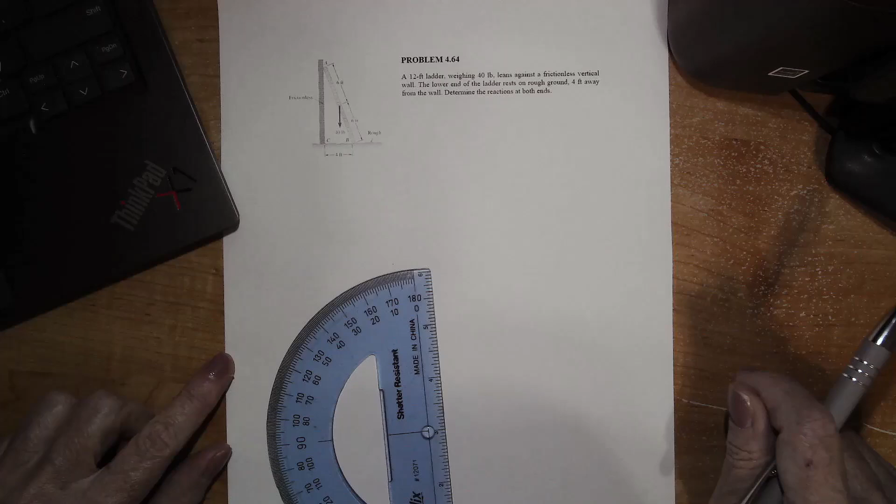For this problem, we're given a ladder 12 feet tall. It weighs 40 pounds, and it's leaning against a frictionless vertical wall. The lower end of our ladder rests on a rough ground, 4 feet away from the wall.

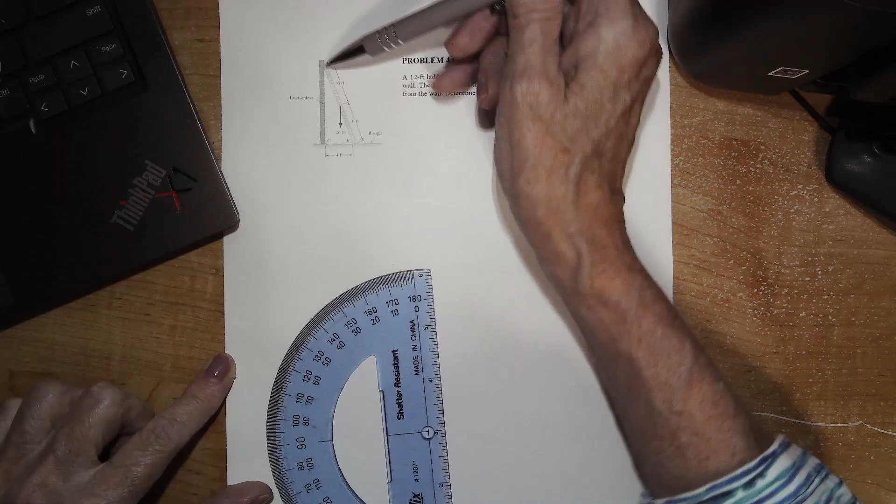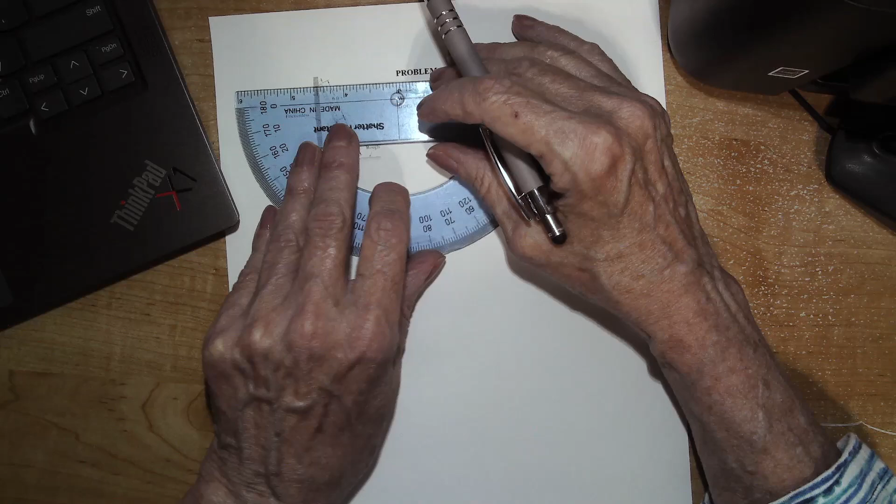So we know the length of the ladder and the distance from the base, so we can calculate the height. We're given that the vertical wall is frictionless, and because it's frictionless, the wall won't sustain a reaction in the up and down direction. It will simply give us a reaction that is horizontal at point A. So we have A here.

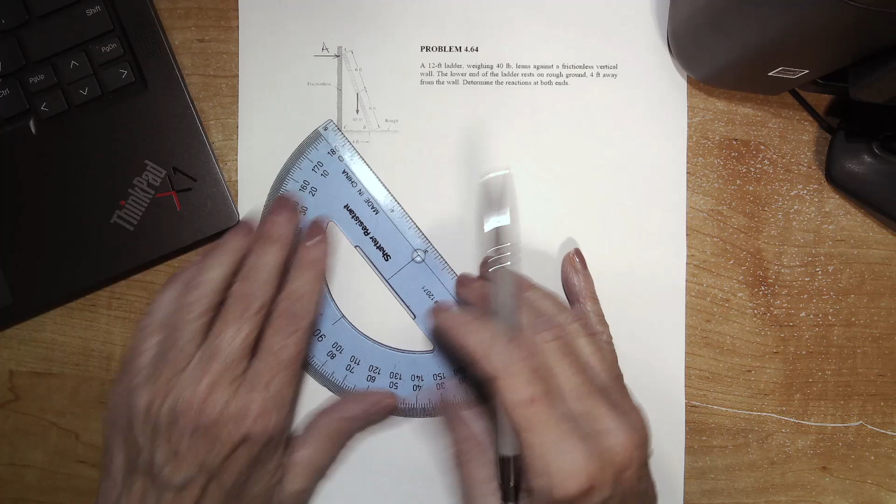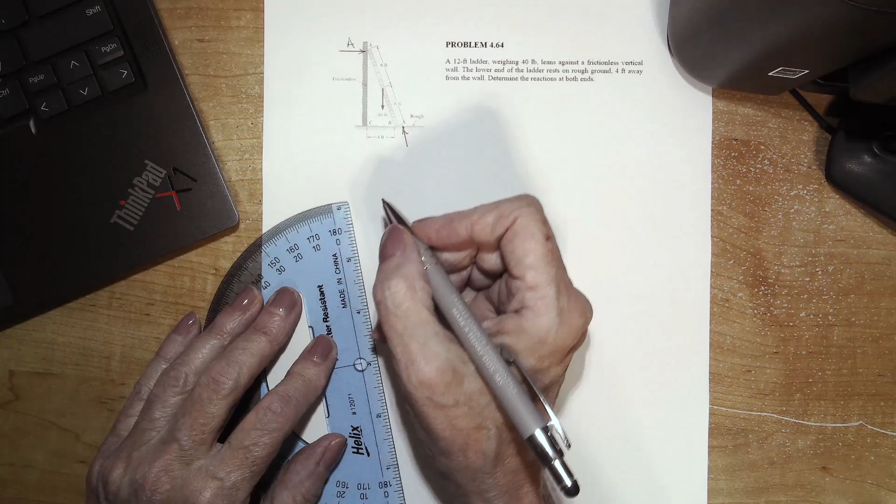Now, at the base where I have B, I'm told it's a rough surface. A rough surface can sustain a force in the X and Y direction here. So we know that we have a force that is on an incline. We won't do BX, BY separately. We're just simply going to draw a rough reaction here that has a little bit of an X component and a little bit of a Y component. We'll just label this B.

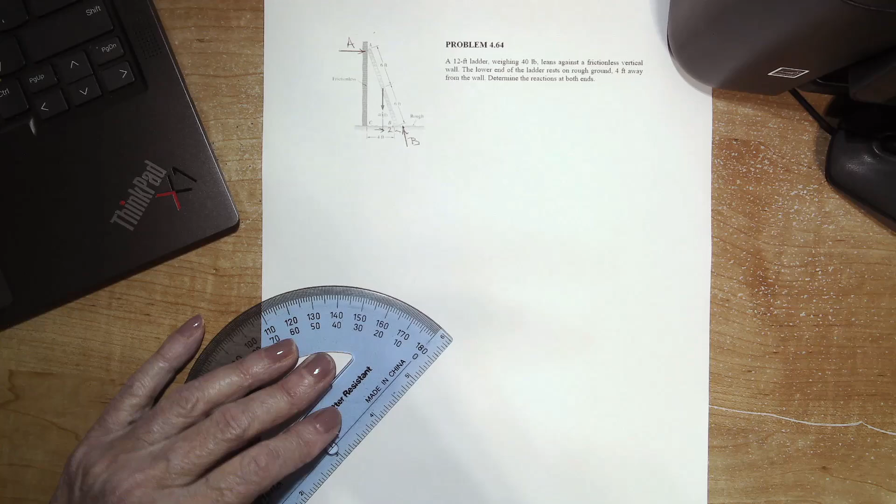And then, of course, our weight is acting at the center of our 12-foot ladder. So we know that if we do the geometry, it'll be in the center, and the horizontal distance to the end of the ladder will be 2 feet. So knowing that, we have the geometry, and we can solve for the height from C to A.

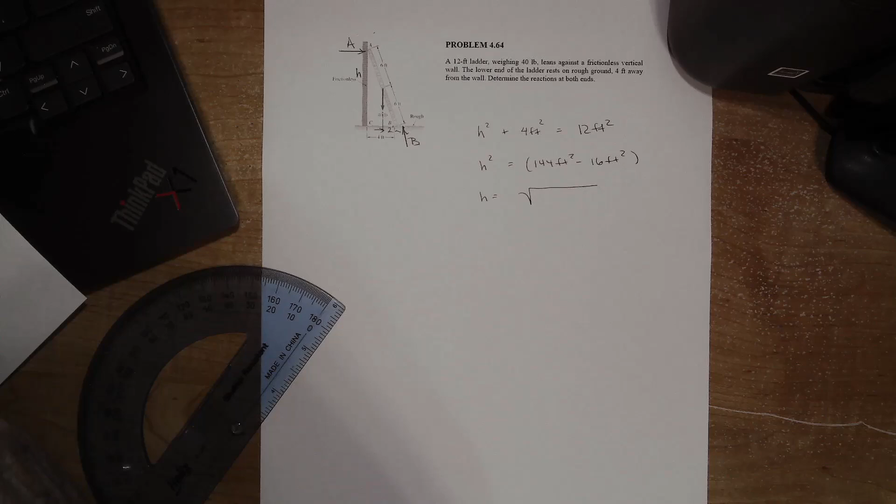We know from Pythagorean's theorem that h squared plus our 4 foot squared equals our 12 foot squared. So h squared equals 144 feet squared minus 16 feet squared, or h equals the square root of 128, and that is 11.3137 feet. So we've solved for h.

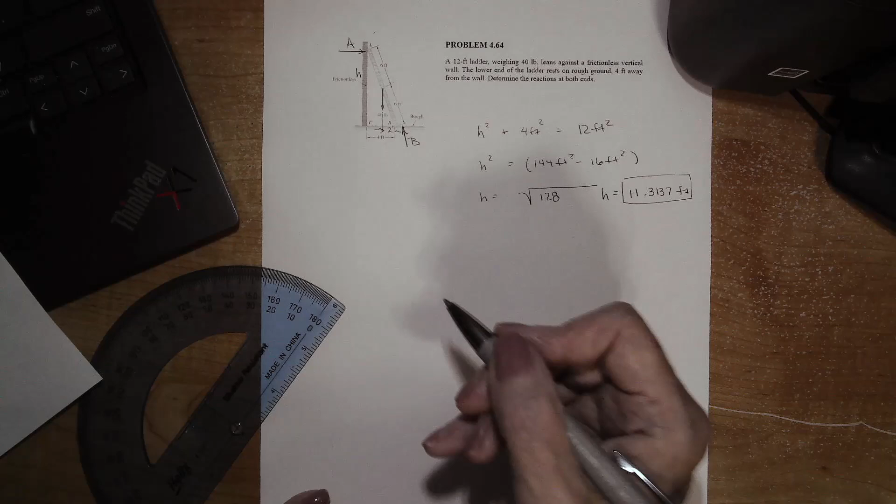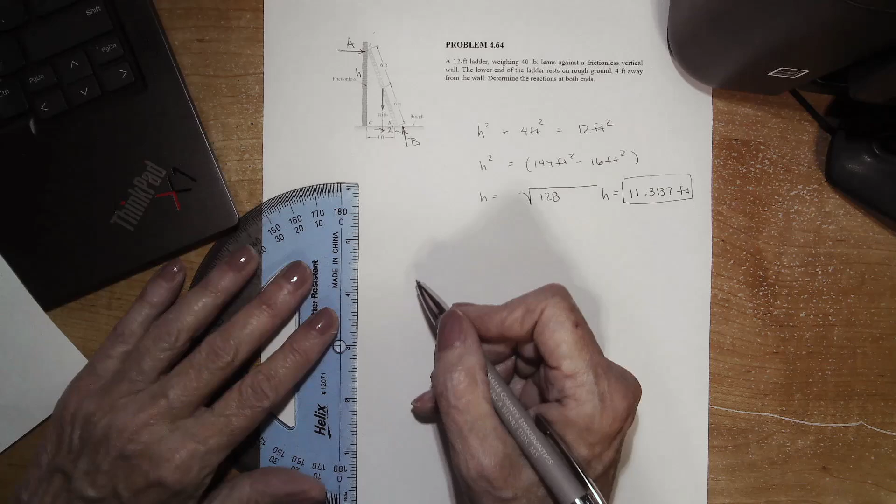So h equals 11.3137. Now let's look at our free body diagram. We know that the weight is 40 pounds, acting in the center of our ladder. We know that we have a reaction at A. Let's just get our ladder sketched in. A, so we have a force there. At B, we have a force that has a component in the X and Y direction. And then our weight is acting right in the center, that is our 40 pounds.

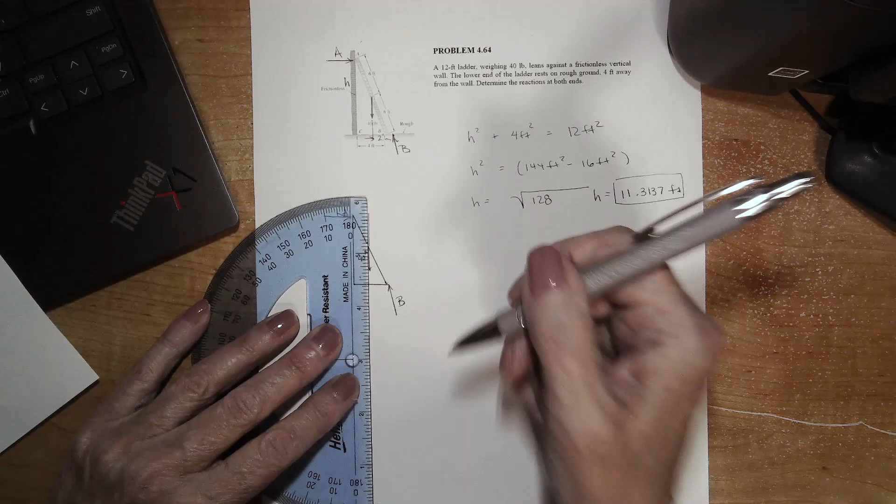And we also know that the line of action B, for this to be in equilibrium, is going to pass through D, where A and W meet. So if we extend our A and our W, and define that as point D, we know that B is going to pass through that point.

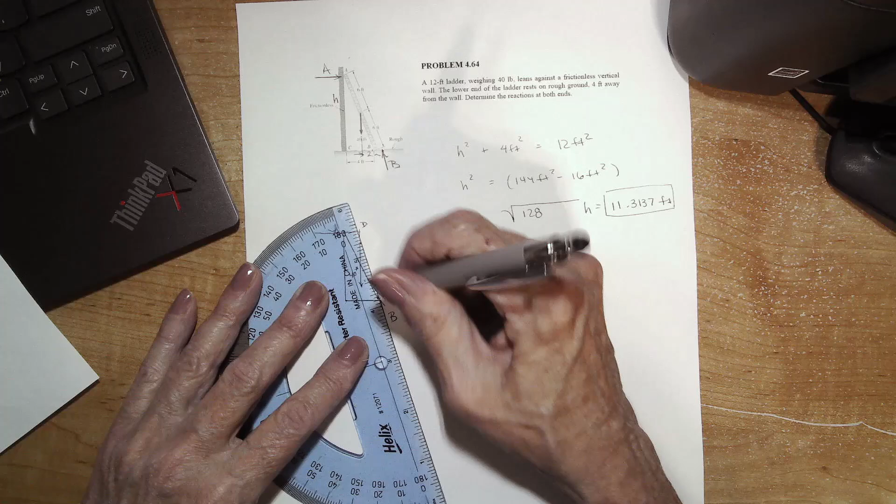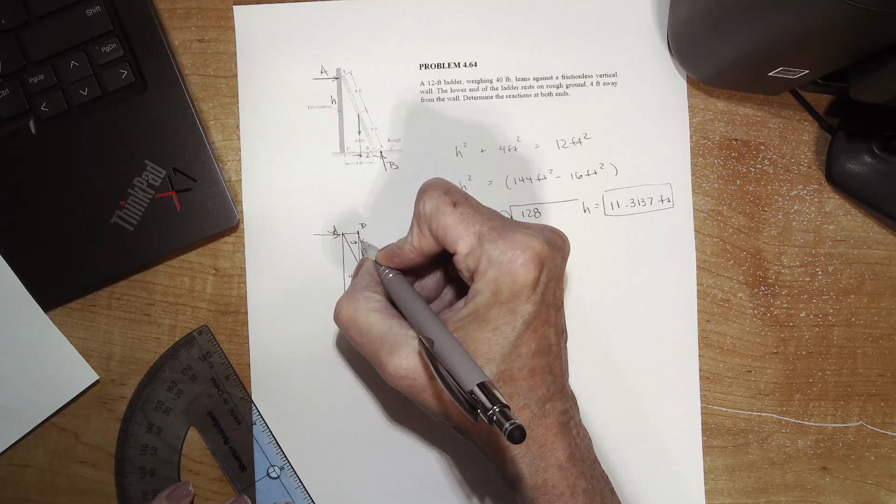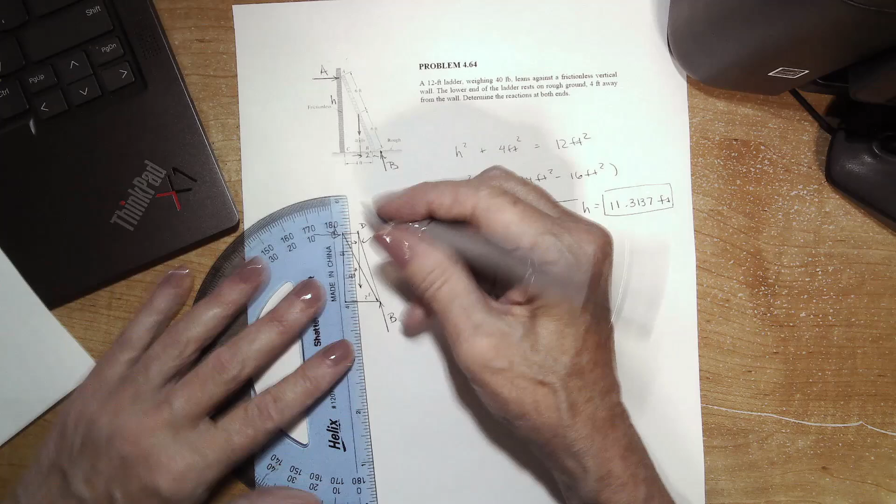So given that, let's solve first for this angle in here. We'll call that theta. And we know the distance here is 2 feet. And of course, we have our vertical length here, that is the 11.3137. So this is 11.3137, and this is 2 feet.

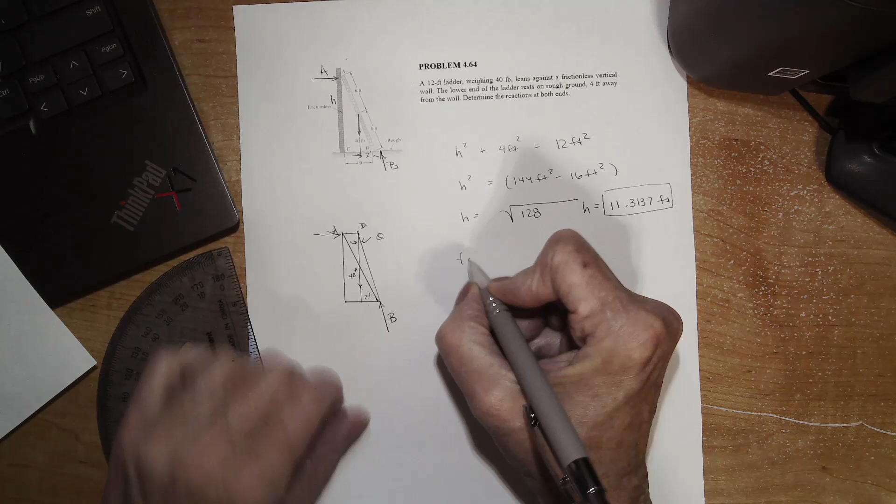We know the tangent of theta equals 2 feet over 11.3137, and that is 0.17677. Taking the inverse tangent, we find theta equals 10 degrees. So that's 10 degrees.

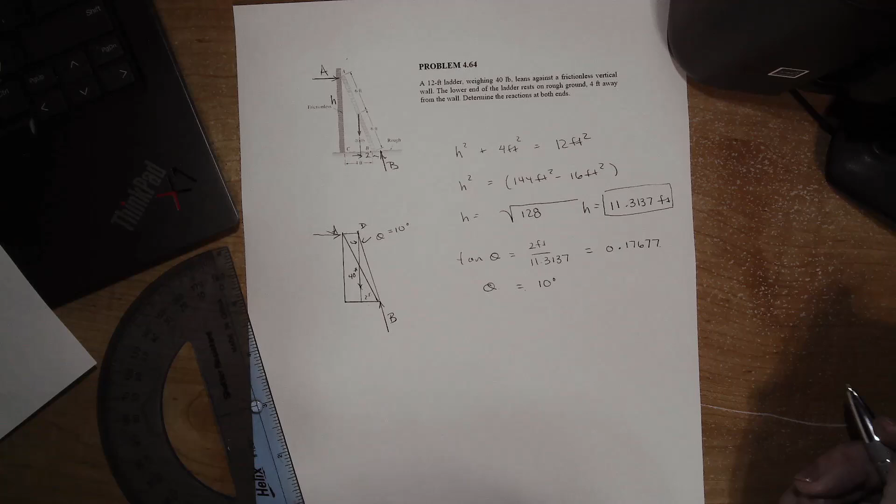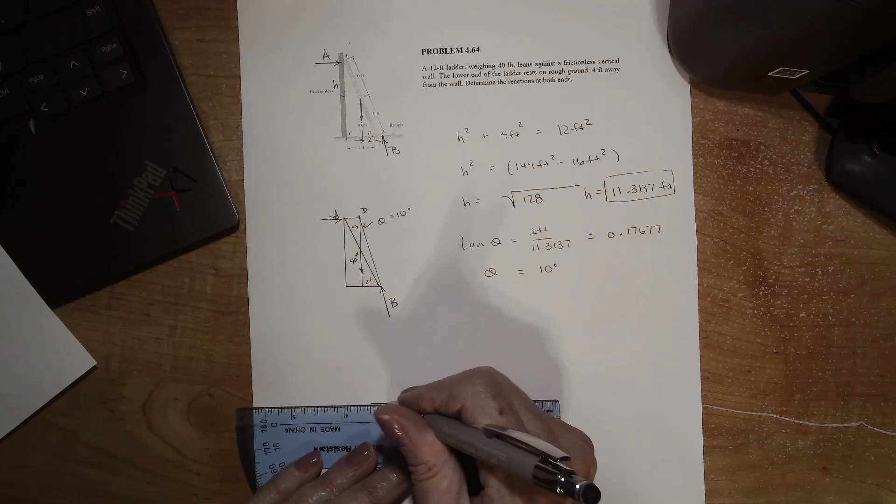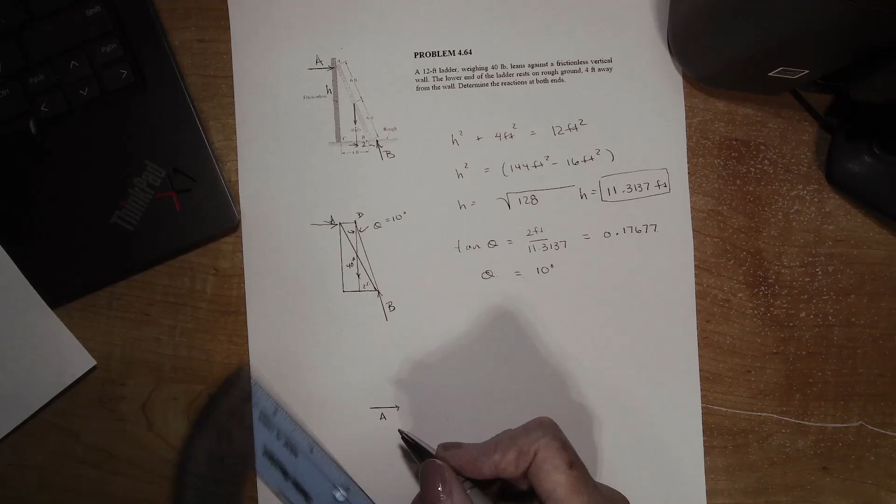And now to solve for the reaction A and the reaction B, we'll use a force triangle. So we're going to start by sketching A. This is A. A is going to be to the right, opposing the weight or the leaning ladder. And then we have our weight, our 40 pounds, which is a straight vertical weight, 40 pounds. And then we have a reaction at B, where we have our rough surface.

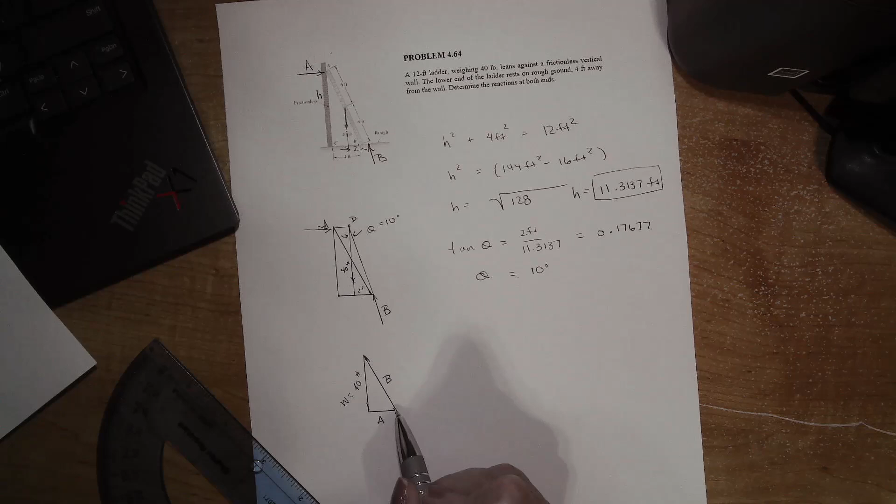So we created our force triangle. We put the vectors arrowhead tip to the end, and we close it up. We're in equilibrium. So we know that we have 40 pounds here, and we know that this angle here is 10 degrees.

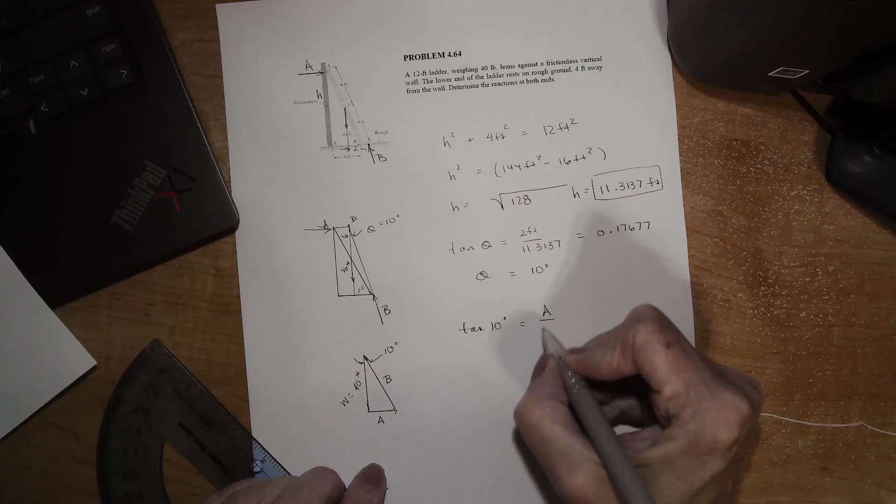We know that for A, the tangent of 10 degrees will equal A over 40. So A equals our 40 pounds times tangent of 10 degrees, equals 40 pounds times that value, so A equals 7.07 pounds.

And that is horizontal... well, since the wall is frictionless, it can't sustain a reaction in the y direction, so it's simply in the x direction. And then to solve for B, we can use Pythagorean's theorem because we've solved for A.

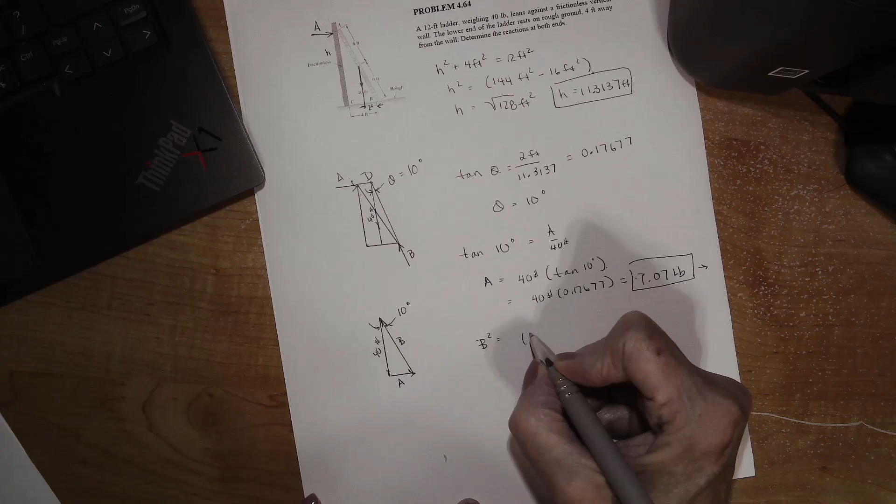And we can say that B squared equals our 40 pounds squared plus 7.07 pounds squared. B equals the square root of 1,600 pounds squared plus 49.9849 pounds squared, square root of 1,649.9849 pounds squared, or B equals 40.62 pounds.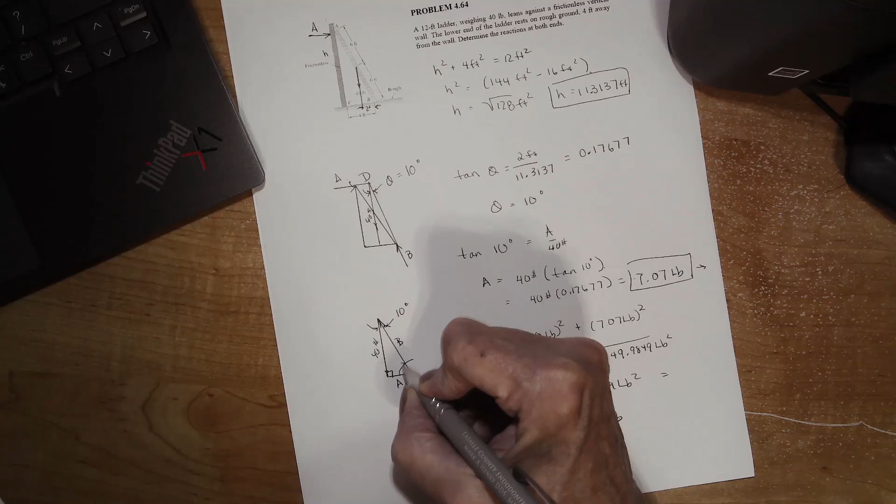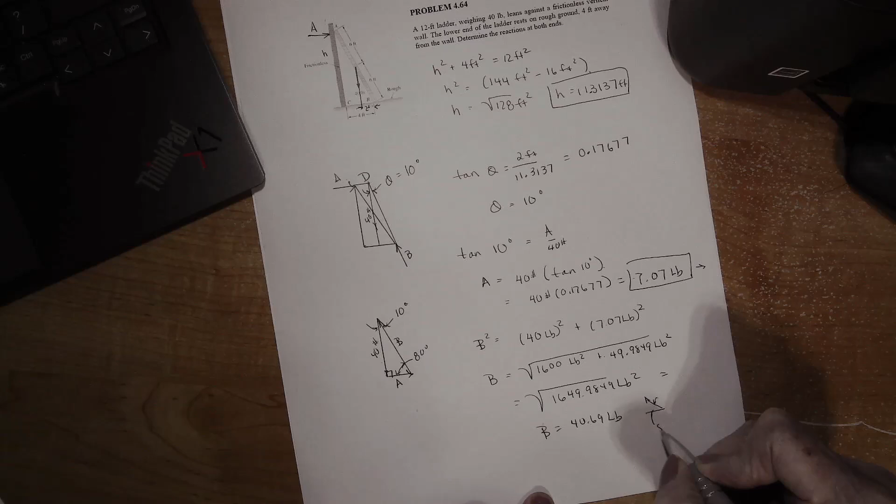And then we can solve for the direction because we know this is a right triangle. The sum of the included angles for any triangle is 180 degrees. We have 90 and 10, that's 100, 180 less that means this angle here has to be 80 degrees. So we know that B is 80 degrees off of the horizontal. So we've solved for our reactions at A and at B.